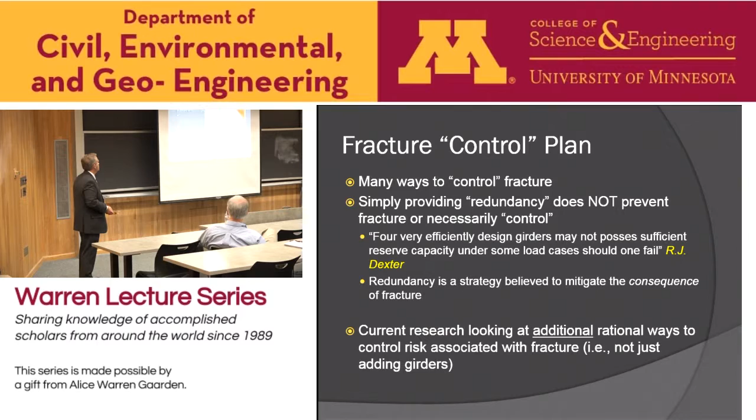When we look at risk, we have to remember it's made up of two things: the likelihood of something going wrong and the consequence associated with it. Very often we only think of one, but it's really two things. Something that happens but isn't a big deal is low consequence. If it's very unlikely to happen, that's low risk. But if something is very likely to happen and the consequence is very bad, that's high risk.

If we can control some of these factors, we can be down in the area we want to be, regardless of how many girders we have. On the likelihood side, that's our toughness, how we detail, our stress ranges in fatigue, how we load the structure. On the consequence side, that's collapse—if something bad happens, is it loss of service or loss of life?

Maybe with a 2-girder bridge, if I lose one girder, it's likely I'd lose the bridge. If I have really low toughness and high fatigue stress ranges and I have cracks, it's likely something is going to go wrong, and with only 2 girders it's probably going to be bad. Today we presume we're always in this column, that losing one of the 2 girders means the bridge will collapse. That's not the case.

In fact, there's no examples in the literature of a 2-girder bridge that has ever collapsed. There was one right here, the Lafayette Street Bridge—we have it at our bridge center. It's a 2-girder bridge, a girder fractured, and it was hardly perceptible. The bridge is a system, not simple statics like pin trusses. There are more examples of bridges classified as fracture critical that have performed well than ones that have failed.

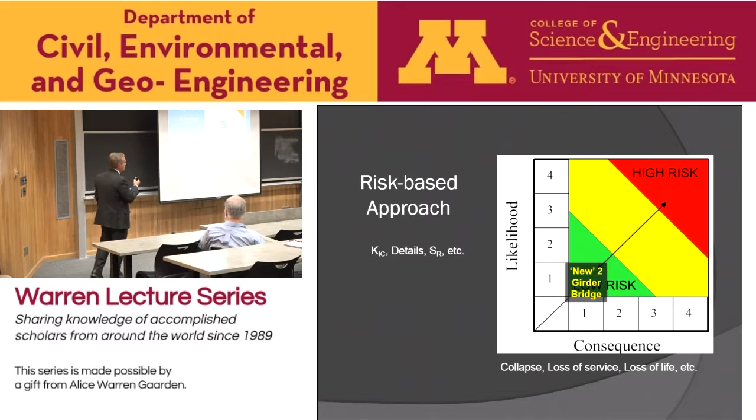There are ways to do this, not just adding girders. So the goal is really to change how we think. The younger people here are the ones to be convinced, because a lot of times the people who've been around this for a long time just say, well, they're fracture critical, they're just labeled that. But that's not really the case.

If we can address it in some rational, well-engineered way that we all agree is thought through, the term really has no meaning, because fracture is no longer critical. The illustration I use all the time is a truss—the tension members are fracture critical. Why aren't the compression members buckling critical? Why didn't we ever label them that?

Why? Has anybody taken steel design yet?

Professor Galambos may comment on whether I'm all wet with this statement, but folks did a lot of good research, mostly at Lehigh. I can say that because we're Lehigh. On columns, we have equations and statistics. They did a lot of work to say I can calculate P critical with confidence. That's why we don't have buckling critical, right? We take in imperfections, we took all this stuff into account, or they did.

We can do the same with tension members today. That's why we don't have buckling critical, we don't treat them separately. All I'm saying is we can do that today in 2016, and so we can get the reliability that we want to achieve.

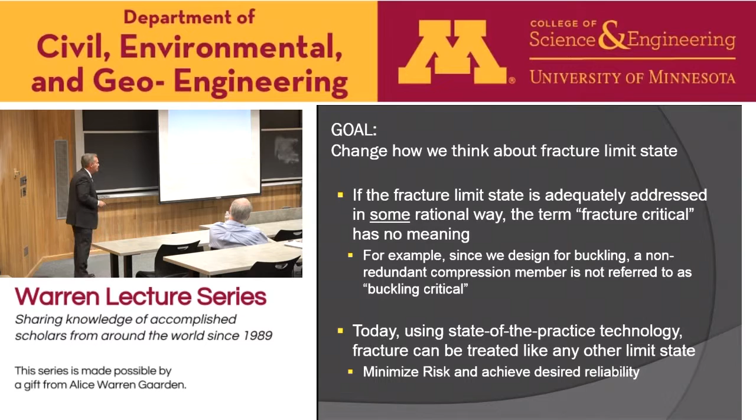There's other things to keep in mind. Like I said, the historical performance of these bridges is excellent, and I say that despite what your mother told you, or your supervisor told you, because people have this feeling that these bridges are bad. Now, they're not. In fact, in this country, there were no fatigue provisions.

Metal fatigue is like if you take a paper clip, if you're bored in a lecture like this, and you bend the paper clip, eventually you have two pieces of paper clip. Well, we didn't have provisions for that in bridges, which are cyclically loaded all the time, until about the mid-1970s. Bridges prior to that were never designed for that whole limit state, but they're not falling down because they perform quite well. So bridges that were never designed for fatigue.

Bridges prior to what we call our modern fracture control plan, and that's really some more stringent fabrication and material selection. So some of the older structures with steel, it's not so great. They've even performed well when a fracture occurred. So the historical performance is good.

In fact, the last study I worked on with Robert, we found no cases where there was pure fatigue and fracture issues that led to collapse. Now you might be thinking, well, the Silver Bridge - you could argue that was one, but we don't build that anymore, right? Brittle, high-strength eyebars. 35W was not a fatigue fracture issue. The Mianus River Bridge, that's fracture critical, that collapsed, that was a corrosion issue with pin and hangers and maintenance.

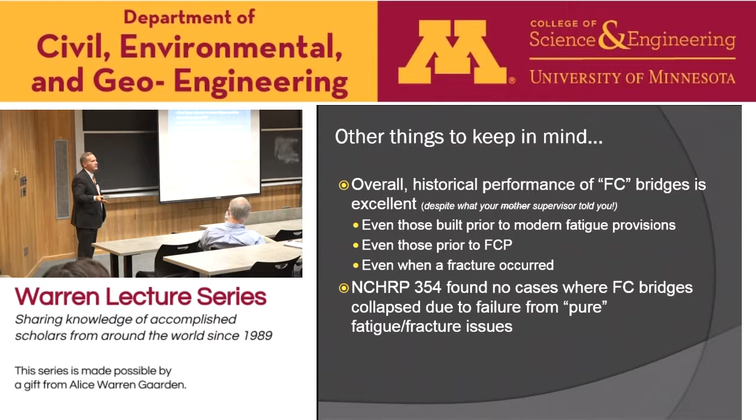It kind of led to some fatigue issues, but it wasn't primarily that. And then the bridge out in Washington State, a truck hit the compression member bracing, and the compression members brought it down. So the cases that people point to, and 35W unfortunately became the whipping boy of fracture critical, had nothing to do with fracture.

So we spent a lot of time on inspection, every 24 months, arm's length, spending a lot of money. Would it have made a difference in the bridges that collapsed? The Silver Bridge, the flaw that led to the failure was about 1/8 of an inch, a flaw you couldn't see. So you could spend all day doing visual inspection on the bridge, look at it, say it's fine, and go home, and it's in the river that night because the inspection technique couldn't have found the defect.

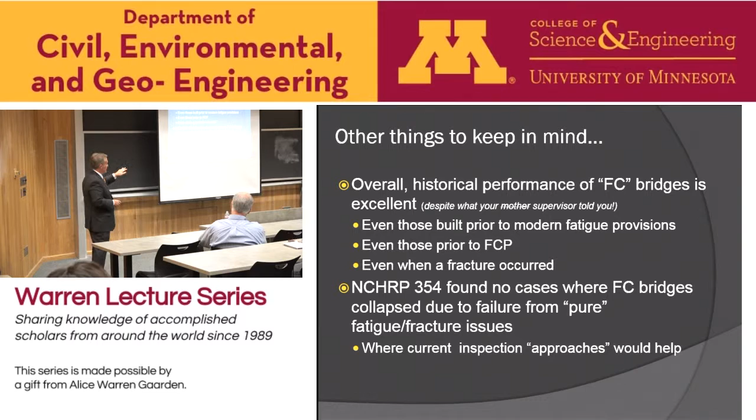So we spend a lot of money on this. We have to ask ourselves, what is it getting us? We spend time doing bridge inspections for safety, and we need to, but we have to think about probability of detection - what is the probability I can find that? I talked to some of the students earlier today where the data that we've been collecting isn't very encouraging about the probability of finding a defect.

One of the studies one of my colleagues did - it's 5 minutes. So if you have a queue of 5 minutes on interstate speeds, you start backing up traffic, you're 24 times more likely to have a serious accident. And so we're trying to protect the public, but we're also endangering the public by closing the lanes and the people doing the inspection. So we better be certain that what we're doing has meaning if we're going to put people's lives at risk in order to do it.

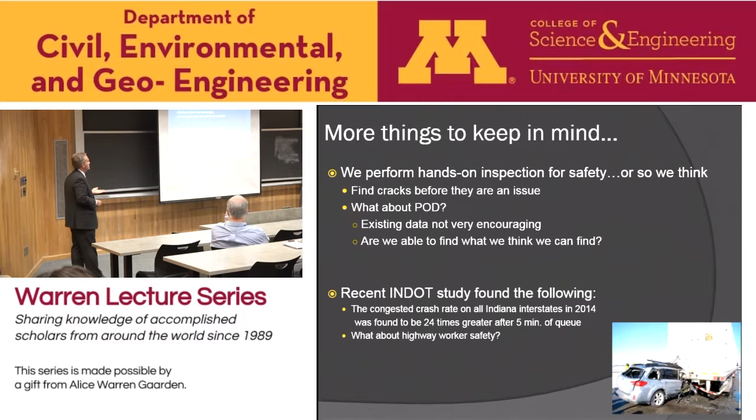So with all that history, there's several projects that we've been fortunate enough to be leading at Purdue. The first two are pooled fund studies where multiple states get involved and contribute. The first one is looking at the toughness of high-performance steel, which is just an industry name for steel that has high performance. Well, it's got more toughness. It's got some good qualities, but the one that it has is toughness.

Has anybody here ever seen a Charpy impact test? The little specimens, about the size of your pinky, you put a notch in it. You can take those grades of steel, put them in that machine, and at -60 Fahrenheit, this hammer swings, and it stops the hammer. That's some tough stuff, right? That's what we want to build out of. A good way to mess up your Charpy machine too, but that's the kind of steels we can deliver today.

253, we talked about that one this morning. If we have built-up members, say I have an older member or a new member where I have multiple components, well, the member is redundant. It's not necessarily the structure, but the member has redundancy.

More on the analytical side, looking at system analysis, we have an NCHRP project we're wrapping up, as well as some work for the National Steel Bridge Alliance on twin tub girders. Basically, if I have a two-girder bridge, one way I can address this issue of a member failure is to take a member out and look at the dynamic response of the structure and show I have capacity in the faulted state for some interval of time.

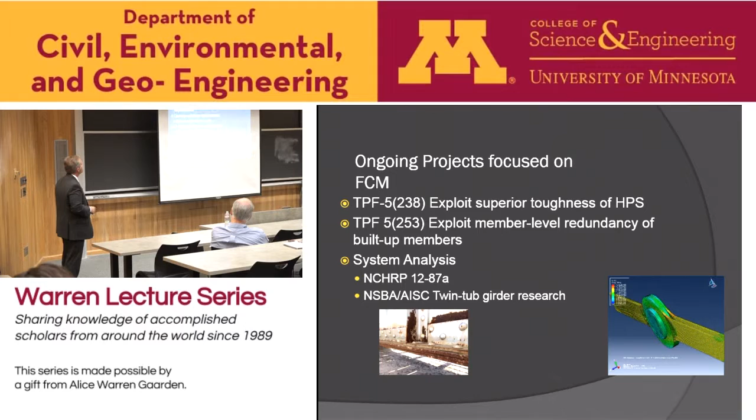So I'll talk a little bit about 12-87a. This is a project that's trying to quantify and provide guidance on a number of things. First of all, what level of modeling do we need to do for this kind of damage analysis? Do I need to do full nonlinear material and geometry and time-step dynamic analysis, or can I do something simple? So we're trying to figure out what we need to do so we're kind of standardized.

We're also trying to give guidance on detailing. If I design a new bridge, there's probably some things I can do to help improve the performance of the bridge prior to the fracture to mitigate or minimize the likelihood of the fracture, as well as after the fracture so I don't have other problems. And how do I tie that into inspection?

Where that comes in is if you have a structure - and I mentioned to some of the folks this morning - we did a test where we used shaped charges to sever the lower chord of a truss and look at its system performance. In statics, it would tell you it would collapse. We had 150,000 pounds of sand on this truss, an old truss from the 20s, a 150-foot span. When we cut the lower chord, it deflected 3/8 of an inch.

Now, that's good, right? It looks good. But why is that bad? Why is it bad to have a structure have so much reserve capacity? Because what don't you know? You don't know a chord failed. It's a two-chord truss, and if you get rid of the other chord, you're going to lose that bridge - I can guarantee that. So when I have capacity for this limit state, not having deflection might not be a good thing. You might want deflection for warning, or at least for how you address inspection.

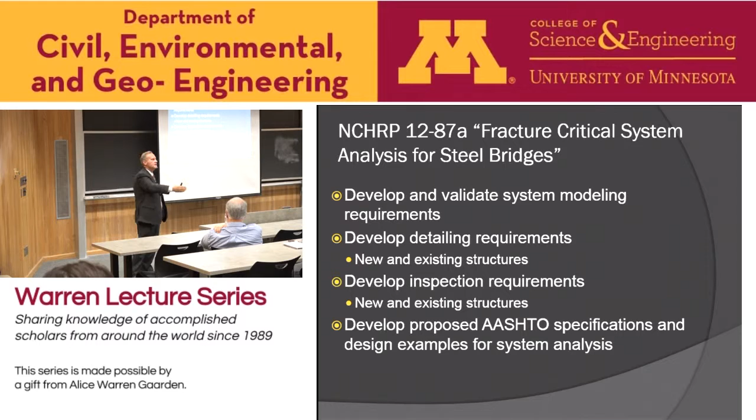And then how do we turn that into something people can use in terms of AASHTO? We're nearly completed, as I'd indicated. We did a lot of modeling of bridges that have had full-scale fractures, and where there was some instrumentation, we took advantage of it. People don't generally instrument these because they don't know they're going to fail, right?

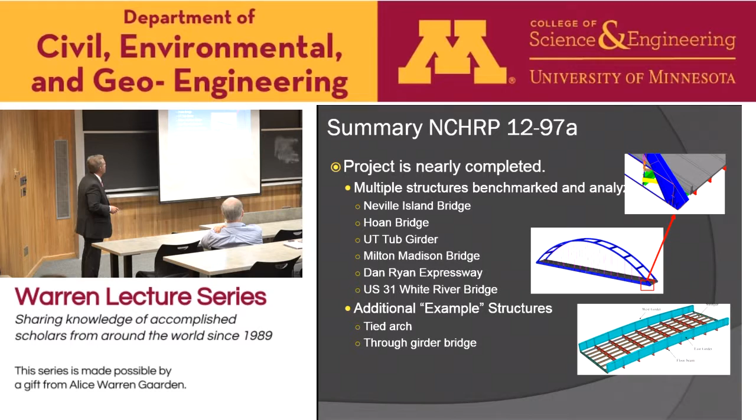But some of them, after the fact, there was instrumentation, and there were two - the Milton-Madison Bridge and some work at Texas - where they were explicit tests to look at what happens after the failure. What we did is we calibrated our approach and our modeling, and a lot of different details of how you model non-composite, how you model composite. And then we went off and tried some other bridges, some tied arches, and some through-girder bridges that are classic fracture-critical type systems. So a lot of fun analytical work.

And as I'd indicated, the system analysis is only part of the story. We need to think about other things in these models, because we're not trying to model crack propagation - we're trying to model the performance in the faulted state. But there's things that affect the life of the structure after the fracture.

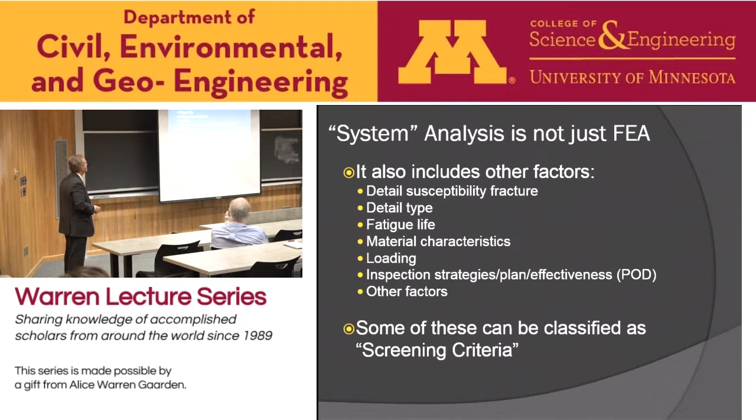You take a look at the structure ahead of time, and you determine how much confidence you have in your modeling. Some of these also have screening criteria—there are certain bridges we just don't want people doing this on because of challenges. So the work is focused on system analysis and how you perform that, but also guidance on determining if your analysis is reasonable, should it be performed, is it valid, and then long-term inspection strategies.

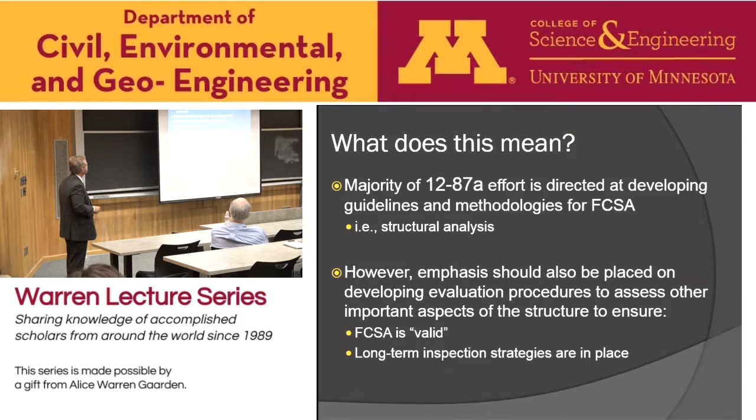A lot of work has been put together to give people guidance on what kind of analysis to do. We used ABAQUS, but as long as you follow the procedures and can capture the same type of behavior, it doesn't matter what solver you use. We gave guidance on material models for concrete and steel and so forth, and guidance on element capabilities. It's been a lot of fun working on the project, trying to come up with a way to do this.

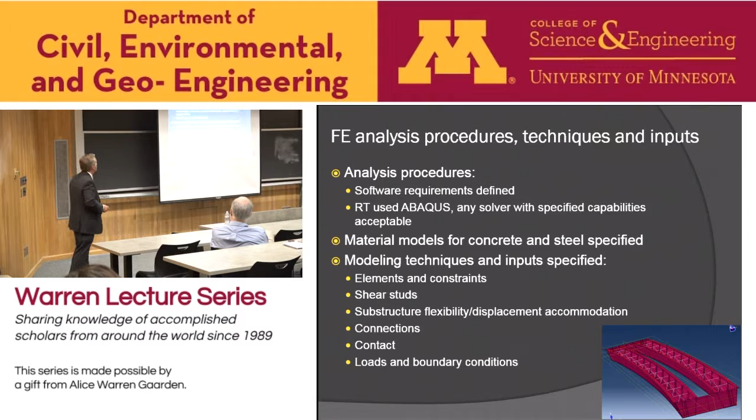The other challenge is the load model. So we can make that finite element model and say the bridge will stay up. The next question Kevin will be asked when he goes to do this by Federal Highway is, under what load? Is it all lanes loaded? Is it full live load? Is it some reduced live load? So we took a lot of time looking at the load models and what kind of approach should be taken.

We're proposing two new load combinations. We call them Redundancy 1 and Redundancy 2. Notice they're not called Fracture Critical 1 and Fracture Critical 2. Why do you think that is? It sounds better—we're trying to, for lack of a better way to say it, get rid of the word 'fracture.' We don't want to use that. Let's call it redundant—it's Redundancy 1. And it is; it's looking at the redundancy capabilities of the bridge. So we're trying to look at it that way.

The first one attempts to look at when the event occurs and the dynamic amplification of the bridge responding to gravity and a certain set of trucks on that. Then after it gets through that, there's the extended service, because the objective, remember, is to change this arm's-length inspection interval to set it in a rational way. So what kind of loading could we expect over some period of time? How do we address that? How do I address the effect of whether or not I have deflection? Those two load combinations are intended to try to look at that.

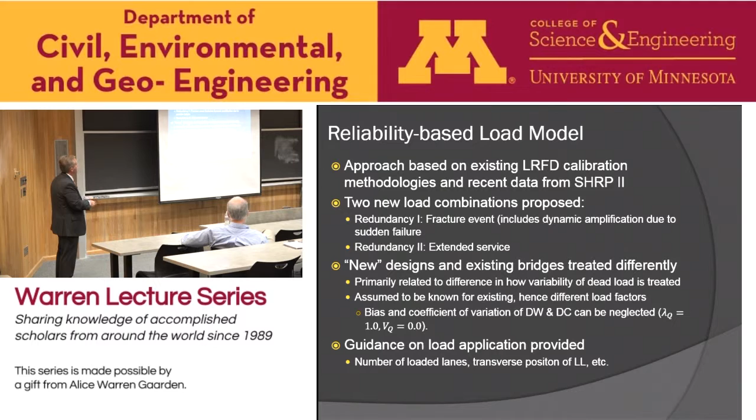I don't know if this will fly with the panel—I don't think it will—but there's the thought of looking at existing and new structures separately. And beyond just the load combinations, there's how many lanes and transverse positions, so we're trying to give guidance on that.

The next question is, what's failure? The bridge gets through these load models—what do you call failure? Maybe deflection is one thing that's easy: it had too much or too little. But what about damage? With these models, you can't really go into AASHTO and calculate a member capacity and compare it to the FE model very easily—there are assumptions on effective width and whatnot, but the model has all that in it. There's no assumption on effective width, say for a composite girder.

So in this case, we're using a mechanics approach—looking at stresses, strains, load-displacement curves, things like that—to try to say, yes, I have enough capacity. It's a different approach than what would normally be done in AASHTO.

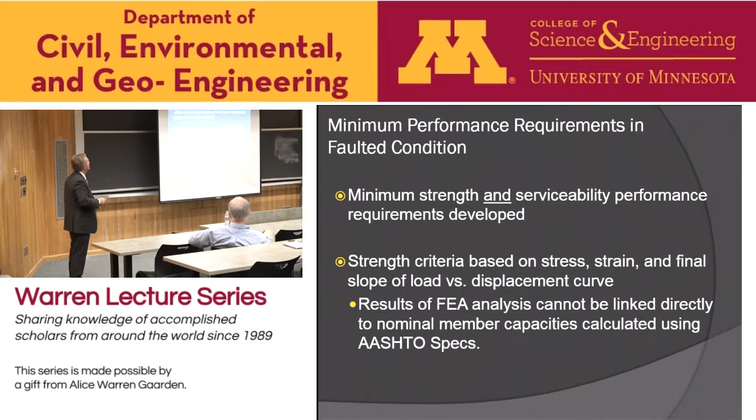And then again, some serviceability criteria. Maybe the structure survives and has enough strength, but it's on a curve—it's a curved structure and you lose the positive cross slope, and now vehicles would tip over. So we're trying to give guidance like, think about those things. What if a bearing lifts up? It's a complicated, skewed two-span bridge, and a bearing lifts up when a girder fails, and somebody crashes into that and gets killed. Well, I don't know—is that redundant? Is it not redundant? So we're just giving guidance on that. And for some of these things, there is no guidance.

Some of it is based on the smoke-filled room, like Robert used to say. You'd get people with experience in a room and say, that seems reasonable, right? You can't do a reliability analysis on how much deck uplift is acceptable.

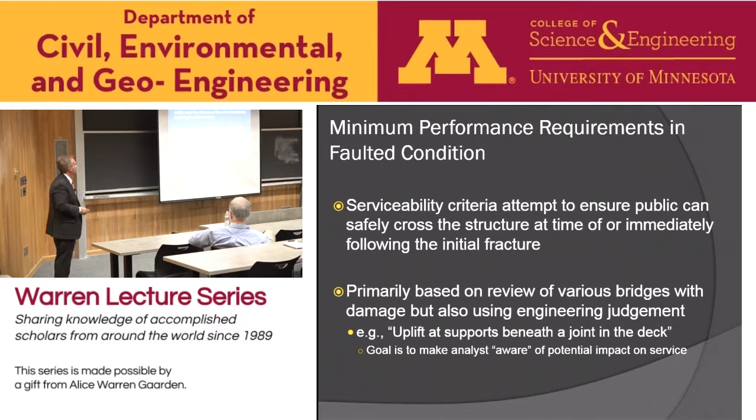So general findings, we think we've got some good approaches on our benchmark models. Some of these that are classified as fracture critical have a lot of reserve strength, and they don't need to be classified as that. Some, interestingly, didn't meet minimum deflection requirements, but they have a lot of reserve capacity. So that's something to try to step through yet. And then, of course, we think we can set a rational interval, get away from this 24-month rule. Okay, so that's one of the projects.

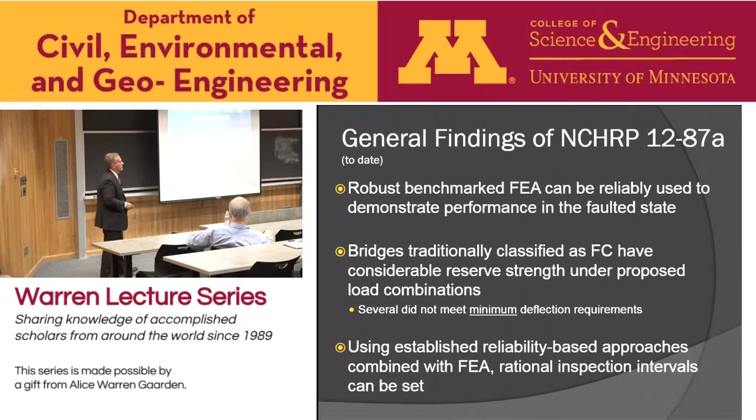But the other one that's been a lot of fun, kind of tying into that, is related to twin tubs. Now, do you guys do twin tubs up here? Do many of those? Yeah, we haven't. Because of fracture critical? Nope. It's all cross-sections have had multiple tubs. So Texas uses a lot, as you know, and Wisconsin has quite a few. And so there's people interested in these girders.

It's twin tubs, so you have like a bathtub and another bathtub. And they're deemed fracture critical because there's two. Now there's 4 webs and 4 top flanges, but there's only 2 tension flanges. And so they're told that they're fracture critical. But they tested one down at University of Texas, and it was quite robust. And analytically, they appear to be quite robust.

So NSBA, they're very efficient structures too, I guess I should mention. They're a nice option for steel. And the curved versions of these things work out quite well, but you don't need 3 girders if you can get away with 2. It's much more efficient. So what this project was looking at is, let's analyze a series of structures and try to provide additional guidance, what works, what doesn't work, and so forth.

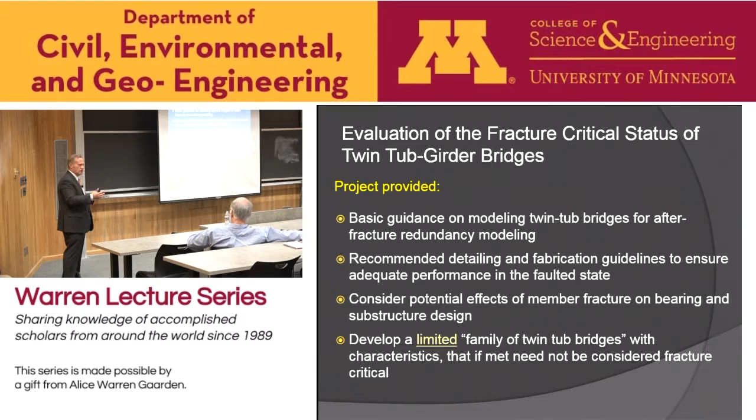And so one of the things we started finding, same with 12-87a, is the importance of being able to properly model or reasonably model shear stud pullout. Shear studs end up keeping the bridge up in a lot of cases if you don't have transverse diaphragms. And so in some cases, we would see girders unzipping, which is what they saw in the full-scale test at Texas. So developing some basic knowledge on that modeling, we're spending a lot of time in that area, getting shear stud models with multiple studs and different stud heights. And how do you turn that into something that's a simple model so you don't have to do this kind of modeling every time? Cem is working on that quite a bit, which is a lot of fun.

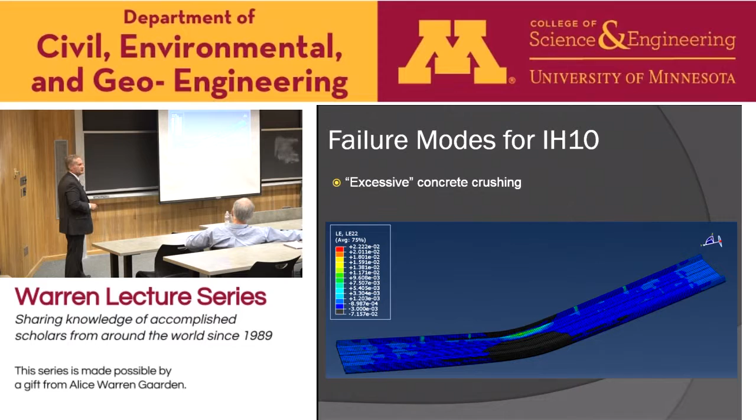But other things like, what's failure? Well, is it too much concrete crushing? Well, how much is too much? So trying to develop criteria for that.

But most of the bridges had tremendous redundancy. In fact, we're doing some work for Scott Becker down in Wisconsin, where we're analyzing some of his bridges. And we did one with the idea of trying to get the Federal Highway Administration to agree to the approach. They did. And so now he's got one that's taken off the list, and we're going to move forward with using these procedures on a number of his other bridges.

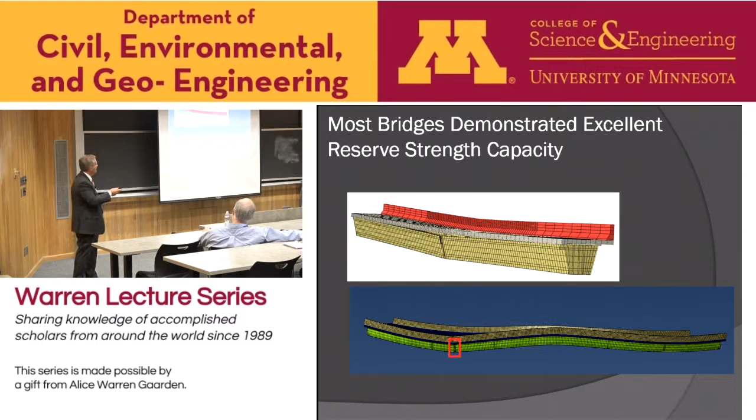But how are we able to do that? Well, you can imagine, picture inclined tubs on curves, with skewed supports. The geometry is a nightmare to do in the FE world, with all the cross bracing and flange transitions and everything that goes into real girders. So to build one of these models takes a long time. And then you find out you goof something up, and you've got to go back and start over.

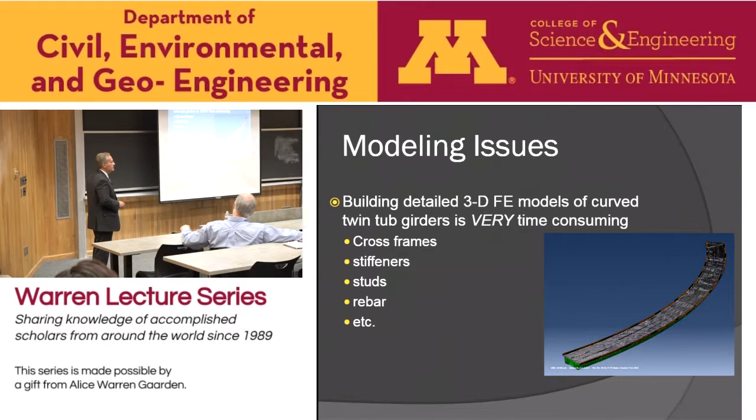Well, one of the grad students, Cem Korkmaz, he built one, and he said, no, this isn't the way to do this. He said, let me write some Python code. And so he wrote some software to build these bridges, to build these models. And this is how we're able to do these complex models now extremely quickly. Nothing fancy, it's writing code, right? But it really saves time. And I think it's a game changer in how these structures could be analyzed.

So it's basic software. You just take a little time to input some geometry, and you can build these in minutes instead of weeks. So you start with some input sheets of geometry, kind of step your way through, fill out the form. Actually, it takes longer to fill out the forms, depending on the complexity of the geometry. And once you build this, let's just let this run if this plays, the software begins to build the bridge.

And we hope this is something that we can generalize to make it available to people, because it only runs in Abaqus right now.

That's the challenge. But through the S-BRITE Center, we're doing a project for Scott, going to evaluate about 12 of his bridges and do the full analysis, and then just show that they hopefully are non-fracture critical. The idea would be to develop a family of bridges, so that if I look at enough of them, I can say if I stay within this box, I can meet these criteria, and I don't have to do this kind of analysis every time. So that's really the objective here, to analyze enough of them so that we can make that case.

So it goes through, and again, this is one of those nice bits of software. Now you can go get your coffee, relax a little bit, let it build the model. And then when you submit it to Abaqus, it might take 3 days to run, but to build it doesn't take too much effort at all once you get the geometry. So our thought is we can hand off the sheets to an owner, and when we're all done, we have a nice little model put together.

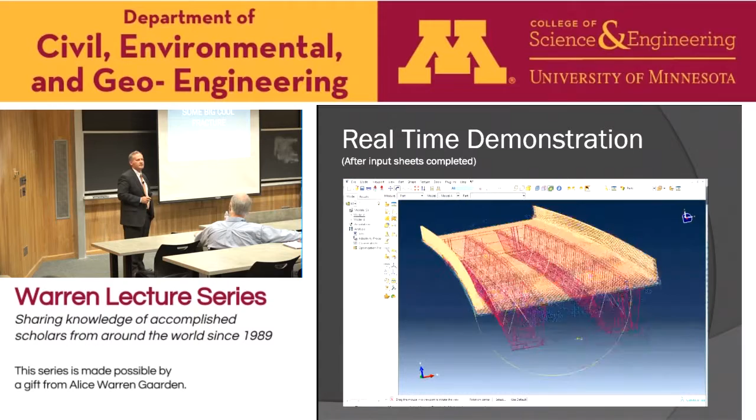So now, in honor of Robert, who is an experimentalist, you can't talk about fatigue and fracture without showing some cool fracture tests, right? So the other project is looking at high-performance steel, steel that has really high fracture toughness. I'm just going to show a couple of tests that we did looking at the girders that have high fracture toughness. So we have two setups in the lab, two girders.

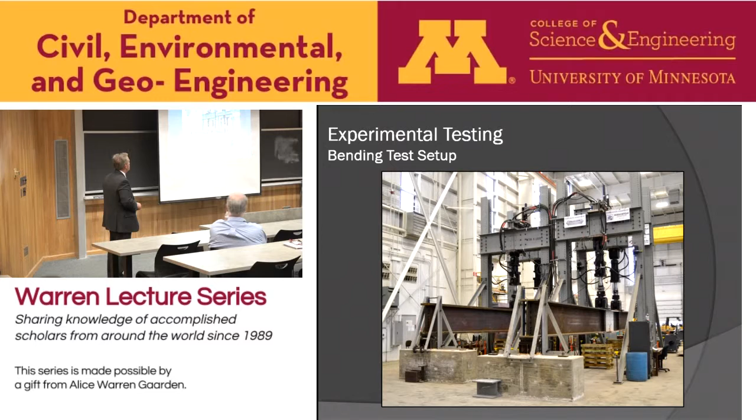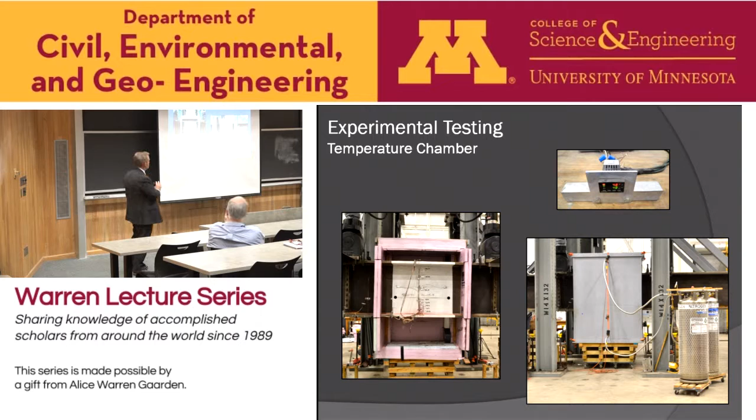These are probably about 42-inch deep plate girders that are 40 feet long or so. This one's already fractured. These were fun tests, large tests. Of course, we have to cool them, so there's been a lot of time developing a cooling chamber that could control the temperature uniformly, then get it off of the specimen so we can test it without destroying the cooling chamber. The folks got really good at doing this, so let's take a look at one of these fracture tests here.

Now, I guess I should say, fractures happen quickly. What we were able to do is use high-speed cameras to slow this down, and it gives you a feel for how violent it is. So it's loading.

Now this is my crack arrest detail to stop the fracture, because if you blow out the girder, it falls on the floor, and that's not fun. Just watch close as the fracture runs through, and you'll see it come up the web.

These are loud. Slow it down to 1 frame per second, and you can kind of count as the fracture runs through. If you look here, it eventually shoots up the web. These are kind of rare videos to get, really neat to have, of fractures running through girders. So we did a whole series of those.

The next one was for axial tests, because flexure is a little different than axial, so we built what we call the Sherbden, after Ryan Sherman and Matt Hebdon, our axial test machine that's good for a little over 2 million pounds. It's all self-reacting, and we pull specimens apart, and we needed to get cracks in them. Axially, to get them to crack is very difficult, so we'd load them in bending to get a crack.

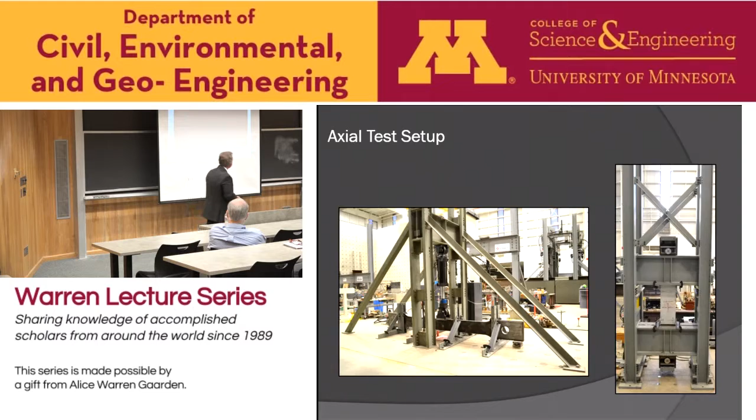We'd notch it, get a crack, bring it into the machine, cool it, same thing with a cooling chamber. I just want to point something out here. This crosshead, I was telling some of the folks this morning, with the specimen and the pin is about 13,000 pounds. This one lets loose, it probably says when he's doing it, at about 850 kips.

And just watch the crosshead. There's your crosshead. Okay, lifts right up in the air, throws it up in the air.

Now, there's another funny thing in this video. So we do a lot of these kinds of tests. Jason Lloyd is my research engineer. Watch Jason when this thing lets loose and everything shakes.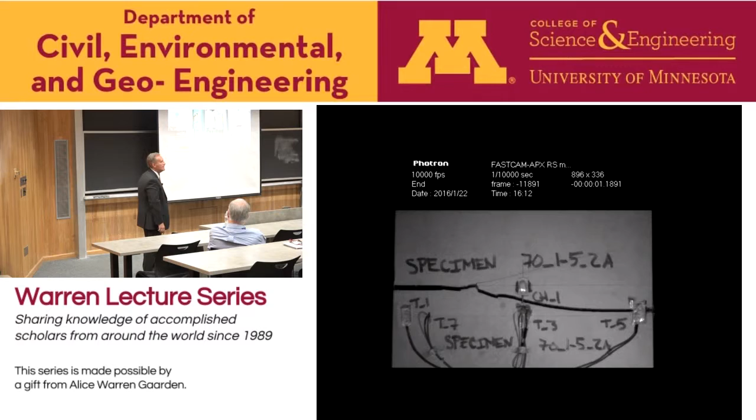Cool hand Luke, right? Now, what you don't see, there was a visitor from AISC to his right in the other video. That guy jumped about 3 feet. We happen to have a visitor.

There we go. Nice bifurcation that arrests. And then we look at this at 10,000 frames per second.

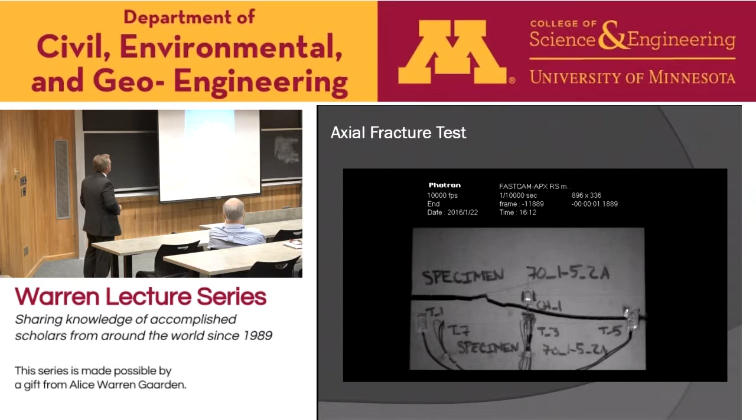So it starts running, then changes direction. So these are just in here because it's cool, right?

These are just neat, but the goal is to try to set new toughness standards so that we can set rational inspection intervals. Again, addressing fracture from a different point of view. If I have very high toughness material, we talked about a couple different projects. The focus was the system, but the cool videos were about toughness.

And then this morning, member level redundancy. We've been fortunate to have a lot of these things wrapping up around the same time. So hopefully fracture critical bridge inspection will change in the near future and become more rational, without decreasing reliability. And there are very innovative, efficient designs we can get with two-girder type systems that hopefully we'll be able to take advantage of.

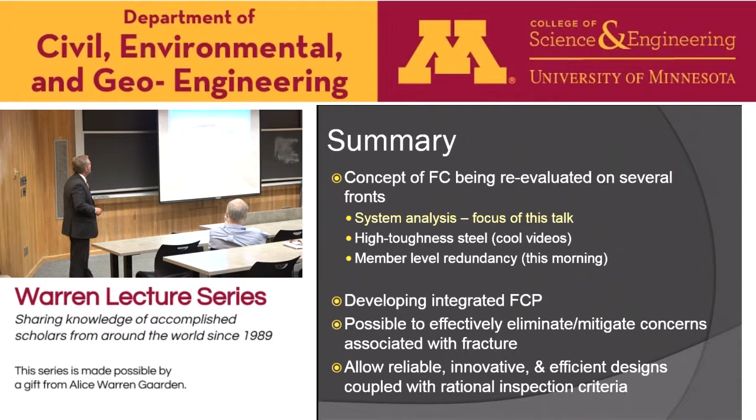Now just at the very end here, I wanted to talk a little bit about a center we have at Purdue called our S-BRITE Center. The acronym is Steel Bridge Research, Inspection, Training, and Engineering. It's 22 acres, but we've developed half, so you're looking at about 11 acres here.

The idea is that when specimens come out of service, entire bridges or specimens, I thought, why do we get rid of them? Why don't we keep them to bring people in to look at for training, professional, undergrad, grad. I can use them for that, but then maybe a colleague doing non-destructive testing would like to have a bridge but can't get out to it. Well, they can do it here using UAVs, whatever you can dream up, right?

So the goal is to have other things besides steel. I'm a user of the Center for Aging Infrastructure, but we would like to have other components. But we have some really cool things there.

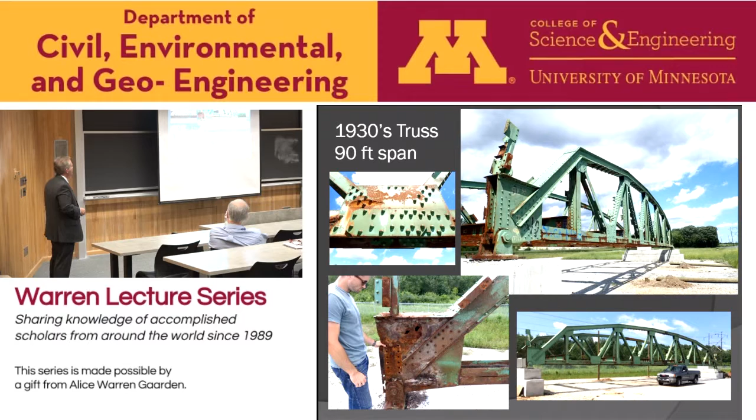We have a 90-foot span truss that was donated from Michigan. We re-erected it ourselves, actually, which has been a great experience. It's got some issues in it, some serious corrosion in welded attachments and whatnot. We plan on putting different types of deck on the truss, so that's fun to have.

We have some big plate girders. These are from the Lafayette Street Bridge, 12 feet deep, and if you look close you'll see there's no bolts on that little pattern there. These were side-by-side twin girders. A fracture went through this girder and the bridge didn't collapse. This would have been fracture critical. This is a very famous bridge for fatigue and fracture people in the bridge world. We're fortunate that Minnesota provided these girders, and they're great teaching tools for us.

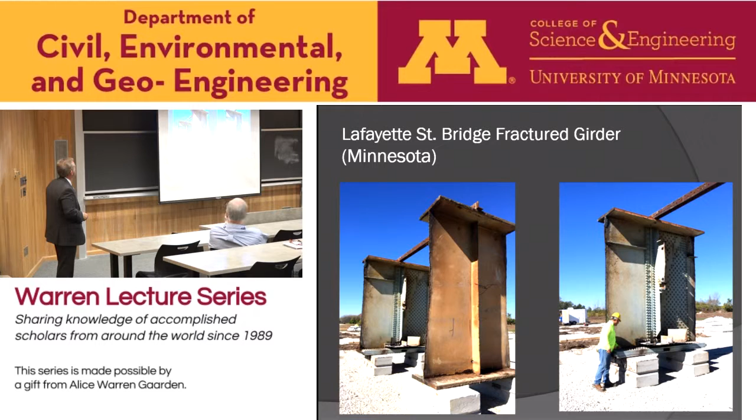These were our big girders until we got some really big girders. These are from Dresbach, and Minnesota and Ames Construction were kind enough to cut out pieces at the haunch. The other girders are about 12 feet deep; Dresbach is about 22. There are probably less than 10 bridges in the country with girders of this scale. They're so big you couldn't ship them widthwise, you had to lay them on the truck long ways, which limited how wide a piece we could get.

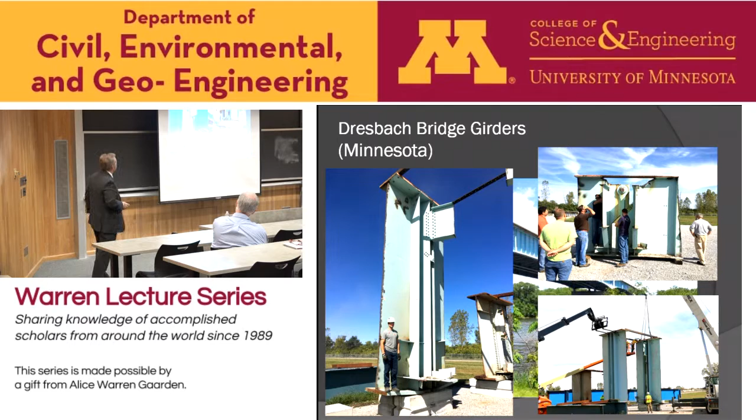We're very fortunate, but also got some pin and hangers from the bridge, some other gusset joints, some bearings. We just had two classes down here, and people were in awe of these, but they're useful for more than just looking at—they have some very interesting details on them. Again, we threw those together ourselves. We were able to get some components from 35W. We feel very fortunate about that, and that's going to go into our pole barn, once erected, for our forensic specimens.

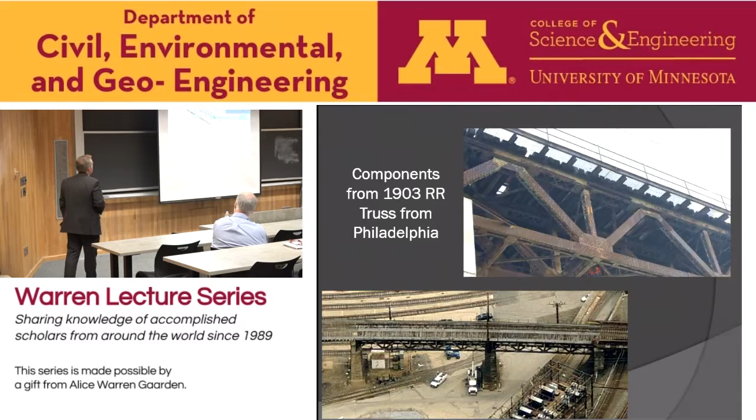The railroad industry has been very supportive. We have some components from a bridge out of Philadelphia, heavily corroded. How do you like this for a compression member? This is supposed to be a riveted, built-up compression member, and I don't see the rivets or half of the compression member anymore. Somehow that was still carrying load in compression—a great corroded member. An entire railroad bridge that was on the Pennsylvania Railroad for years, then in Pueblo, Colorado for years, then got shipped to S-BRITE, and we re-erected it, getting railroad ties and rail on it as well.

It's got that railroad bridge smell from the creosote. So it's a really neat addition to the facility. It's got fatigue cracks and a fracture and a whole series of things in it.

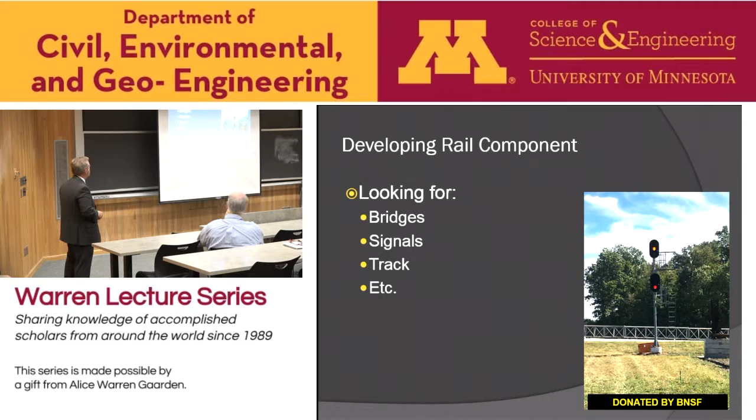And we're trying to get our railroad work going further. We've got some signals donated, but we have about 1,200 feet of straight run where we're thinking about trying to put in some track. And some of the BNSF, CSX, and NS have said they'd like to help us do that, so that'll be fun to do. And then a lot of other different things.

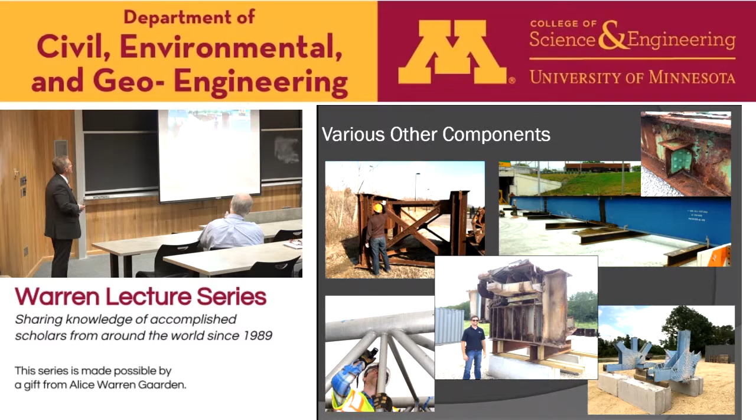The reason I'm bringing this up is that it's a neat opportunity to have it. If you're in the area and you want to see Bowen Lab, it's a great facility to see. I also invite you to come take a look at the S-BRITE facility, because it's a neat atmosphere for training, and it's just neat to get to see some of these components.

This was a thing I remember years ago - Dexter and I would be talking about it at 2:30 in the morning in his office, like, why can't we keep this stuff? This would be great to have some of these components. And so it's finally coming to fruition to have some of these things.

So with that, I'd be happy to try to answer any questions on the topics. And again, I thank you for the privilege to be able to come and talk to you on this day.

Probably loud enough. Oh, okay. So watch what you say, huh?

You mentioned in your presentation this morning that you talked a little bit about inspection and the reliability of inspection. Could you touch on that a little bit, please?

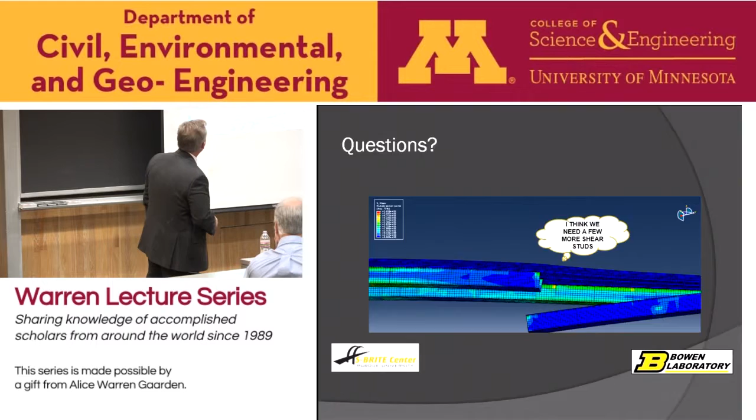Sure. Do I have... no, that was it. So one of the projects we're doing - are you familiar with this one? Do you know what the results are? No? Oh, okay. I was going to say, you sure you want me to talk about this one?

So one of the things that happened - there was a bridge in Indiana called the Sherman-Minton Bridge that was made out of T1 steel. It had some cracks in it. As you know, sometimes that steel has cracks. And there were inspection issues. We had to make some serious decisions about keeping the bridge open.

One of the things we had to do was non-destructive testing, in that case, and visual testing. Before we made those decisions, I brought in Glenn Washer from Missouri, who's an NDE expert, and we agreed that we need to get a handle on the variability. So that if somebody says a crack is an inch long or there isn't a crack, we need to know for sure, because we were going to make serious decisions.

And we found there was tremendous variability in MT and in UT. All level 2, all accepted - whatever you'd say they need to have, they had. We rejected one MT and two UT people because they were so out of bounds. And there's no criteria - we had to make it up. They were pretty liberal, but they still didn't meet it.

Which then we noticed in the inspection reports for the visual inspection, there'd be a crack and it would be an inch long. Two years later it'd be maybe, I'm going to say, an inch and a half. Then the next time it was 3/4 of an inch. Then they didn't find it. Then it was back. And that started us thinking, there's variability here.

So what we decided to do is we built a bridge that's in the air, so you have to work out of a man lift. And all the boring parts of the bridge, say a plate girder - every 20, 25 feet you have your cross frames, but between there it's basically web-to-flange weld, Category B, nothing fancy. If you took all the boring stuff out and squeezed in all the gussets and all the junk - we did that.